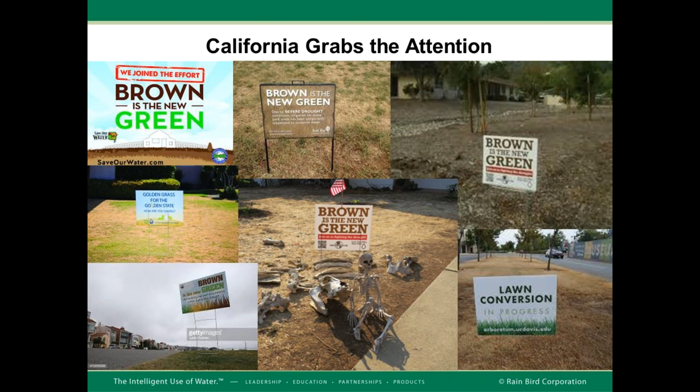These pictures did much to raise awareness as well. Pictures speak louder than words. And when people start thinking and acknowledging that there's no possible way we can fill up a Lake Shasta, we can't fill up Lake Oroville, etc., it starts to make a bigger impact than just a regulatory requirement of, hey, here's an idea, turn off the water while you're brushing your teeth, for example. And that's important, and we should all do it. But when you start seeing these kinds of pictures showing this amount of water need, it really did a good job to put our message forward that water is important and not just going to be there forever.

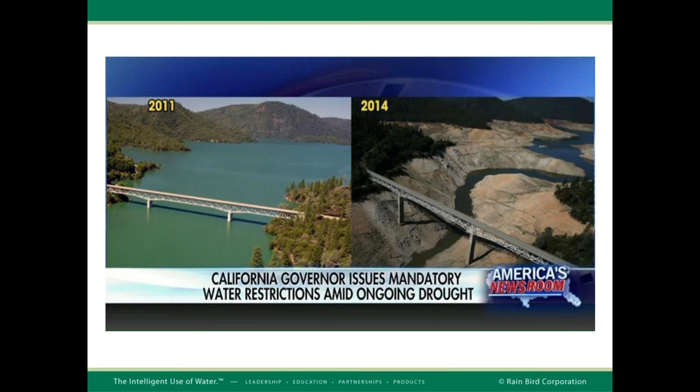At the risk of focusing just on California, it's just by way of an example, but it's really a worldwide problem. Rain Bird's in over 130 countries. We've had and seen drought in all types of various locations throughout the world. And these technologies, we're focused on in the U.S. primarily in our thinking, but these can be adapted and have been adapted all around the world.

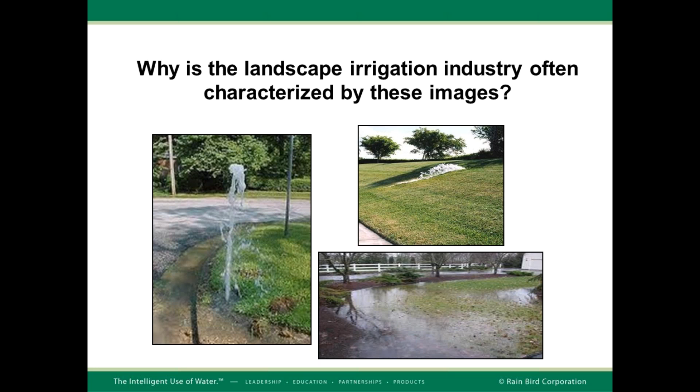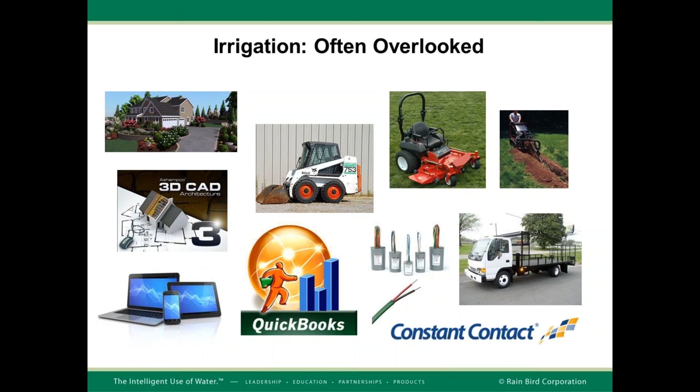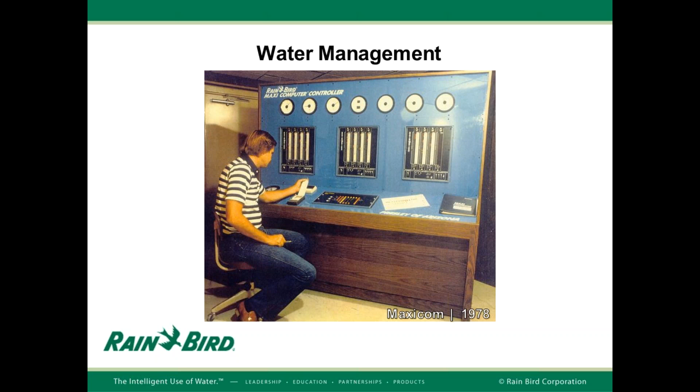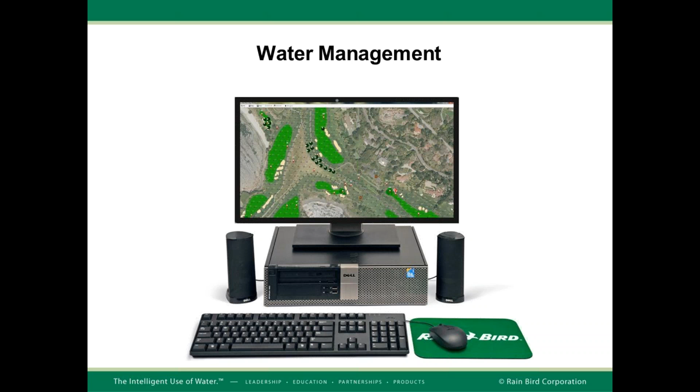Moving forward a decade or two, we get into systems that run on a familiar Windows-based PC, for example. This happens to be a golf system. It's a great tool for water management that we've had for a long time.

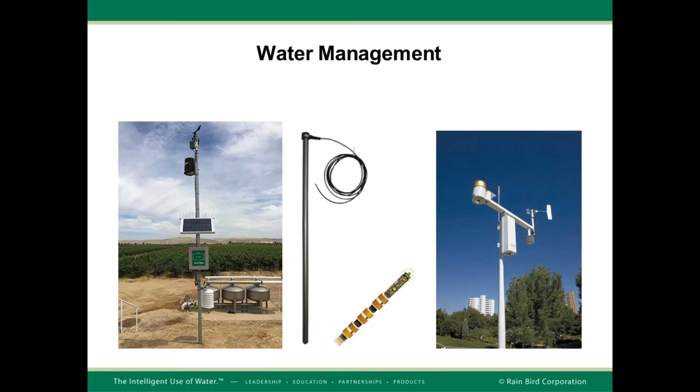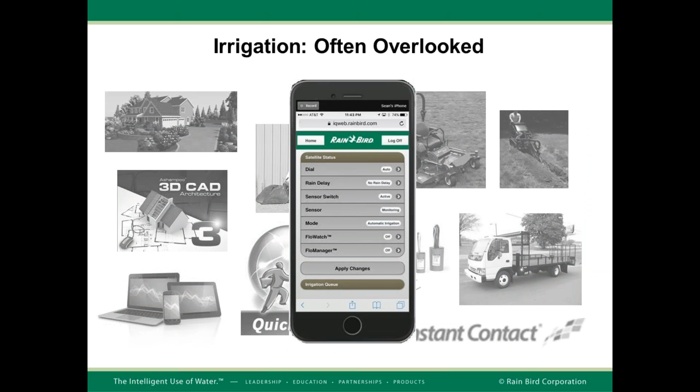Now, we've continued to make those products. Obviously, there's been demand for them, or we wouldn't have been in business and able to continue making them. But the difference today is you can look at all of this on your phone and on your iPad. So we've all seen images of the folks at the beach holding the cartoon of the folks at the beach holding their cell phone up and getting a tan line on their chest in the shape of their cell phone. You know, people's faces are buried in their phones. The fact of the matter is if we can't access something on our phone or on our tablet, oftentimes we don't put any focus on it.

So the good news about today is being able to adapt these pieces of hardware and make them accessible through the cloud now gives us an opportunity for these to be used en masse and not just the leaders of the industry anymore. Next slide.

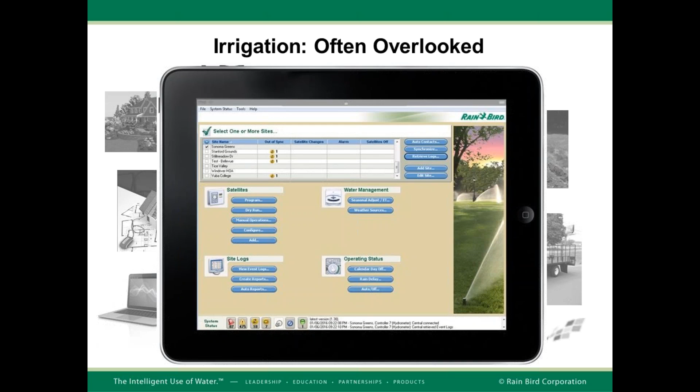Rainbird's approach—we've long had controllers in the marketplace that are familiar to users, so it was incumbent upon us to keep the controller the same but add a piece of technology: a way to access that controller through the cloud. Whatever mobile device you have connects, and for these big commercial controllers used in landscape turf applications, a cartridge pops into the controller, letting you access it remotely.

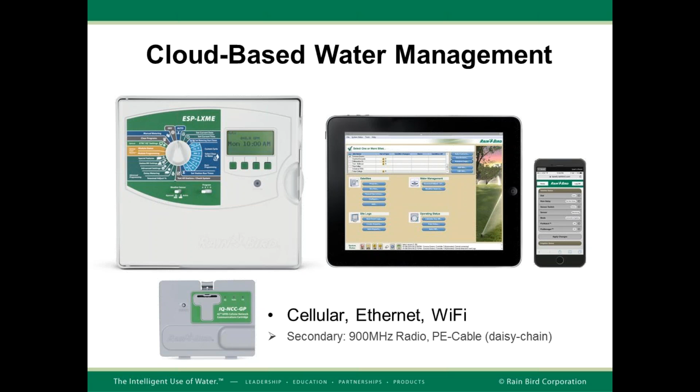Something unique is we've had cloud-based technology in the irrigation market for over 15 years—and when I say we, I don't mean just Rainbird, I mean collectively. The options have been out there, and people have gotten tired of fees. They lose their appetite for paying that annual fee because they forget how much water they're saving, or how convenient the reporting and other benefits are.

Something pretty cool Rainbird can do: if you've got a big homeowners association or city with a lot of controllers on a median or boulevard, you can go cloud-based to that first controller, then in the field connect additional controllers either with cable—not as common these days—or 900 megahertz radio, which works really well. Now you've got a network of controllers all going through one we call a server, which can reduce or even eliminate fees depending on Ethernet or Wi-Fi capability. These technologies make using the cloud with a lot of controllers possible without a lot of ongoing cost.

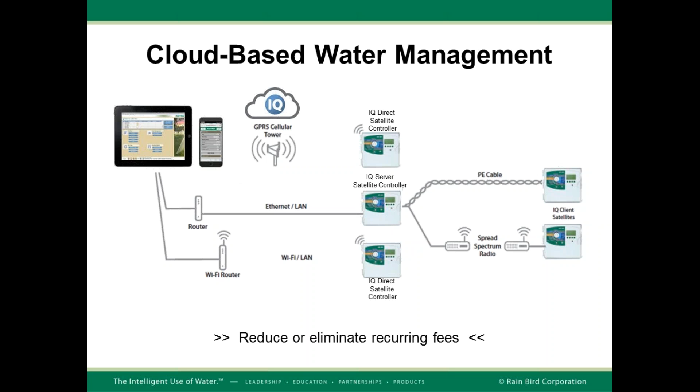This has also hit our ag division, and I want to take a second to talk about water savings from maybe a typical customer's viewpoint.

Unfortunately, not everyone cares so much about saving water. We wish they did, but we all know we've got to tap into other ways to get our products into the hands of customers, because saving water often isn't a motivating factor on its own. In agriculture, for example, every drop of water put down unnecessarily dilutes herbicide, pesticide, and other chemical applications. That's big-time money loss, and it can affect crop yields. So whatever we can tap into—the customer's pain point or motivation—that's what we want to do, and we'll take the benefit of water savings regardless of what priority it is for them.

Building management systems—this is another one. Often a city or entity will have building management systems, and every single thing they have in the city is connected except for the irrigation. So this is an opportunity Rainbird will be jumping into in the next few months.

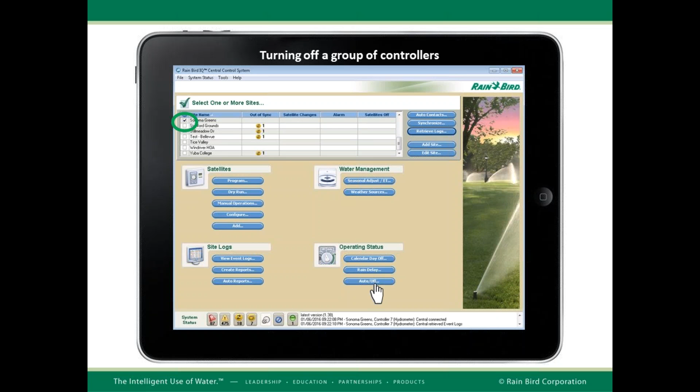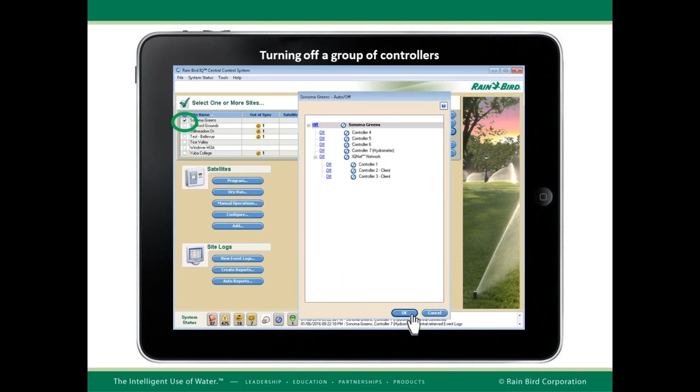Convenience, again—follow the little white click here and turn off a bunch of controllers all at once. Often in commercial applications, these controllers can be in locked closets, taking an insane amount of time for a person to go around and shut them off. But in this example, we just quickly turned off an entire HOA.

Meaningful reporting—what do we mean by that? Visual, graphical, a way for people to look and see what should have happened, shown as the gray shaded area, and a blue overlay of what did happen, with the ability to click anywhere in that graph and see exactly what was on or off.

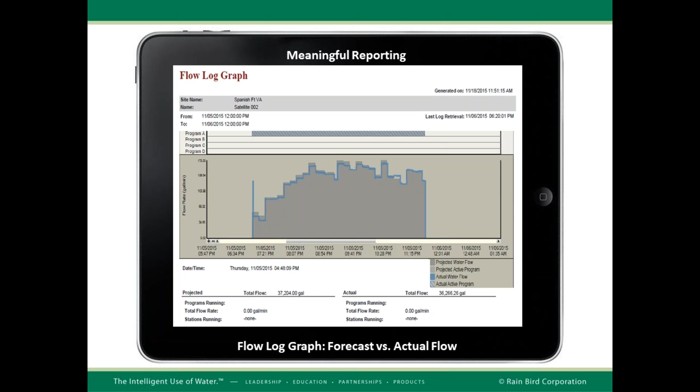This slide is again very typical of most contractors trying to get into smart controllers—they don't want the controller making any decision apart from their influence. In this case, the controller was put into alarm-only mode. The customer said, this is good, I'll watch it, but I don't want this controller shutting anything off automatically. Without belaboring the tiny details, the blue line represents what actually happened, and the gray below represents what should have happened.

All we're really looking at in this example is a 24-hour period where the customer should have put down 75,000 gallons of water. This is a big commercial site, but instead you'll see the red circle, 150,000 gallons of water was put down, because the customer did not want the controller to take any automatic action. We were able to pull this report and find out that station number 52, with 70 gallons a minute, was stuck open for who knows how long before this 24-hour period. Just another example of tools a customer can use.

Now the customer switched the controller, thankfully, to an automatic shutdown mode and started getting full benefits of the system.

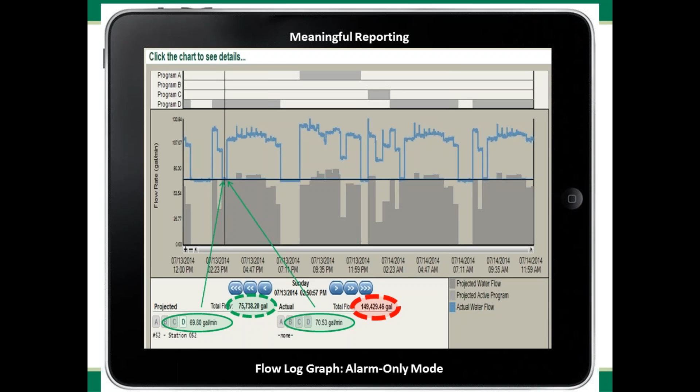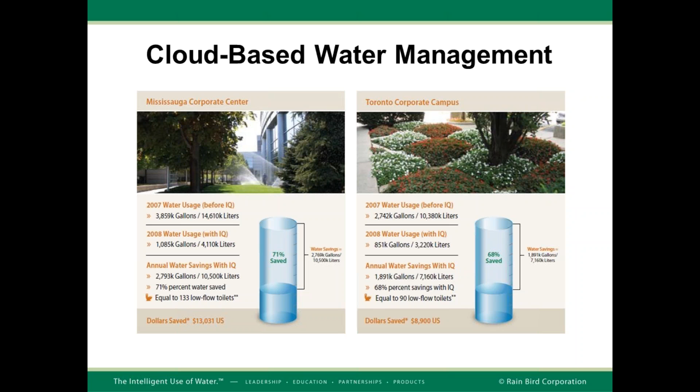So, water savings. A lot of people push guarantees. It's very difficult to guarantee water savings of a particular number, but we routinely see more than 50% water saved on the typical site. If someone's managing very well, it's not going to be 71%, but virtually everyone can save water versus what they would have put down if they adapt to this technology and use it, even in a limited fashion.

Rainbird has admittedly been a little bit slow compared to some startups and other companies that have jumped into the smaller controller world, what we kind of refer to as residential controllers. The demand has gotten so high that Rainbird, Hunter, Toro, a lot of the bigger names that have been around for a long time have, thankfully, due to competitors like Rachio and others, said, hey, we need to get this into the hands of individual homeowners and small customers without the need for large capital expenses.

So what about the future? I mentioned the competition - I love competition, it pushes everyone to do better. There's a lot of competitors in the controller space because, quite frankly, it's not as much of a challenge to make a controller versus a pop-up sprinkler that requires millions of dollars of factory equipment. And that's good for the control systems arena, because that means people can jump in and push each other to do better, and I think we've all experienced that on the manufacturing side.

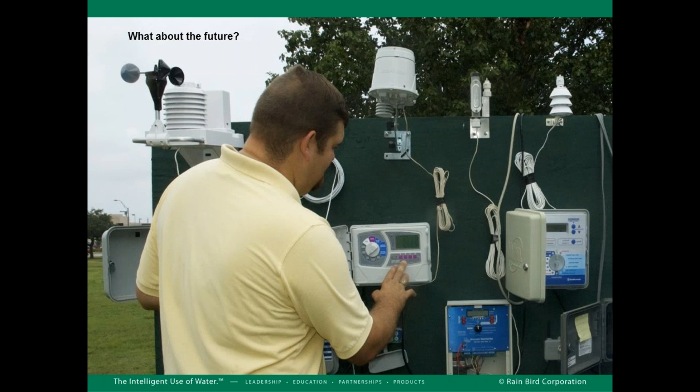So that is what we have on the Rain Bird side for today's short webinar. Rain Bird's mission is the intelligent use of water - that may be familiar. If it touches water, Rain Bird wants to be involved with it. My contact information is here for anybody that wants to take that down.

My last name actually has - I guess I can't spell my own name. It's Timmons, Timmons, no, with a T - we did that, that's our mistake. I'm sorry, Luke. No worries, we'll fix it, I get called Tim all the time. Sorry about that. No, but that wraps it up for the Rain Bird side, and I'm curious to see what we've got next.

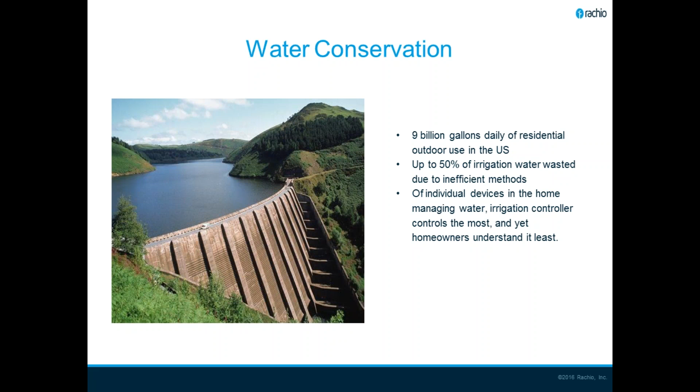So a little history on Rachio. There's quite a few amazing companies, and I will once again say Rain Bird has been a phenomenal manufacturer in this space for many years. We certainly are the new guy here at Rachio. We were founded in 2012, so I always think I can still count how long we've been around on one hand, which is both exciting as well as showcasing how new we are in the space.

But since 2012, we've had a tremendous amount of success. Just to give you a sense, we are out of Colorado, where Clay and I are today, in downtown Denver. It's been a fabulous place to start the company, be part of the company, but also it makes a lot of sense because water is such a big issue here.

When we started, our founders, Chris and Franz, started the company because they wanted to make a difference. They wanted to create technology that could really solve a big problem. I think we could all identify, no matter how long you've been in this space, walking your dog or driving down the street and seeing sprinkler heads pop up after a rain. In 2012, we were going through that exact deal here, a major drought in Denver, and Chris and Franz said, you know what, that's a problem we're solving. As they got into it, they recognized it was a major problem that we have to solve.

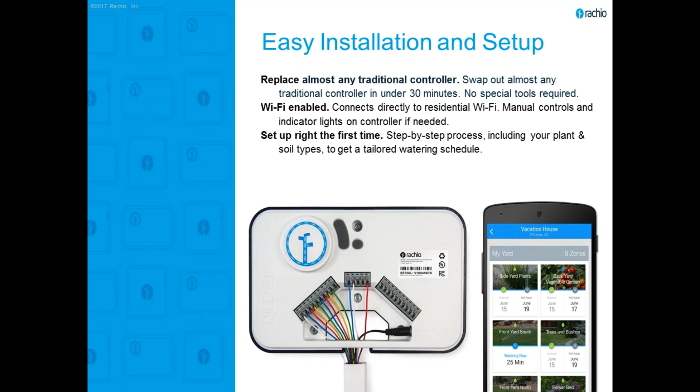What I mentioned about homeowners' reluctance or difficulty engaging with these devices in the past, Brian's spoken to this a little bit - we've really focused on making the creation of schedules and the configuration of the controller as easy as possible. With that, we're bringing them through this process about telling us about their zones, what's growing there, and providing them the support they need via support articles and in-app support that helps them properly set it up. Once we have all of that input data, we're asking them to create a schedule that best fits their restrictions and needs.

We have two different schedule categories, as I call them. The first one is our fixed category, which allows people to set a schedule that waters specific days of the week or an interval of their choosing, and then selecting those specific days that they can water. Let's say that they do face restrictions - we will actually propose watering times for them based on individual zone characteristics.

The second category is what we call our flexible schedules, and what those do is take a look at real-time ET and make adjustments to watering interval instead of duration throughout the course of the year. So with both, we're focused on making seasonal adjustments, but at the same time making real-time adjustments, looking for things like precipitation events, rain events, if it's going to be freezing, if we should skip because there's risk of an in-ground burst, anything of that nature. Again, we're just trying to make it easy to understand, predictable, and really engage the homeowner around how this device is applying water to their yard.

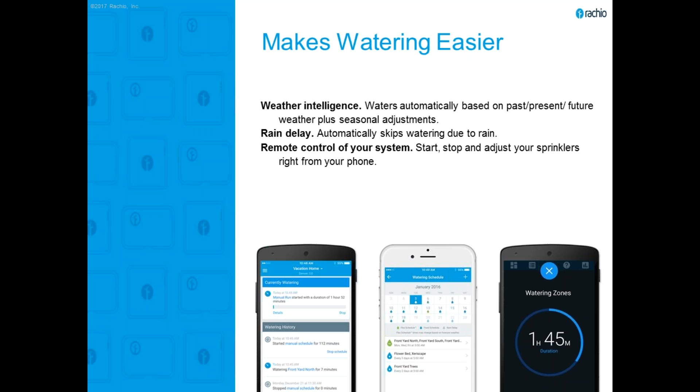With this functionality we've developed, we've received both our SWAT and our EPA testing. In both of those tests, we achieved irrigation efficiency of around 100%. That's taking a look at runoff, whether irrigation is adequate based on ET for any given crop type, soil type, things like that. We achieved that in all zones but one across both of these tests. So we know that the controller is very accurate in determining how much water needs to be applied to the yard.

Another thing that we're doing is beginning to think about flow, and our controller does allow for flow sensors to be attached to it. With that, we're hoping to provide our users a better understanding of how much water is being used in the yard. This is something I've seen in Southern California and Colorado, but people don't realize how much water is being applied to their yard, as part of that disconnection or disengagement with this device. People think showers or faucets are really areas where a lot of efficiency can be realized, whereas this irrigation controller dictates so much of the residential water use.

One of the things that Rachio has enjoyed, and it's really part of our DNA, is the ability to bring simplicity to something that's very complicated. I know everybody on this phone understands that water efficiency is complex - it's mathematical, with a lot of different inputs. What Rachio has done and will continue to do, as part of our promise to the industry, is to bring both simplicity and a user experience to the table that engages the consumer.